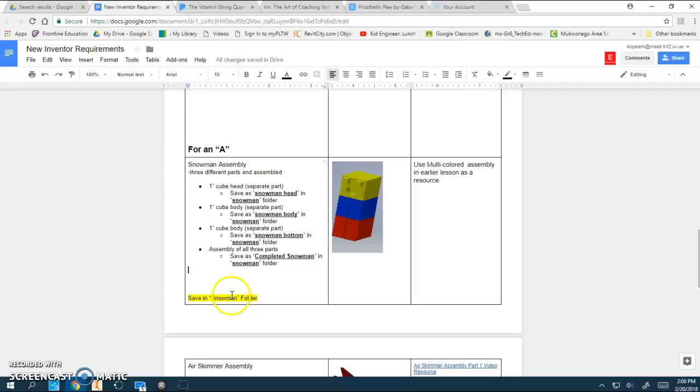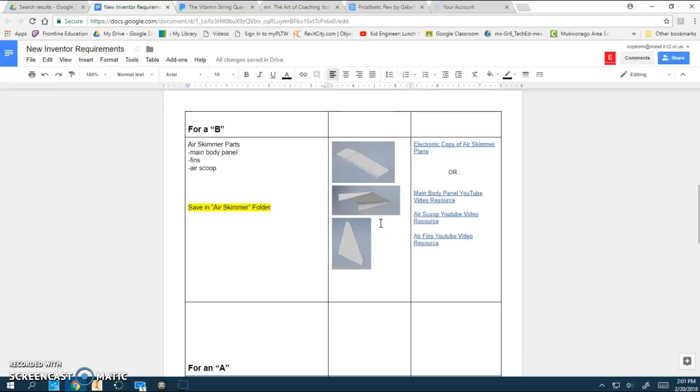Now what we're going to do is take the air skimmer parts that we've created up here on your new Inventor requirements checklist. We're going to take those and form an assembly, putting all of them together just like this.

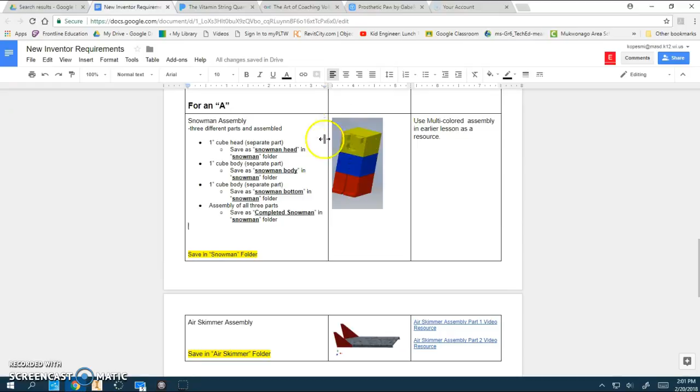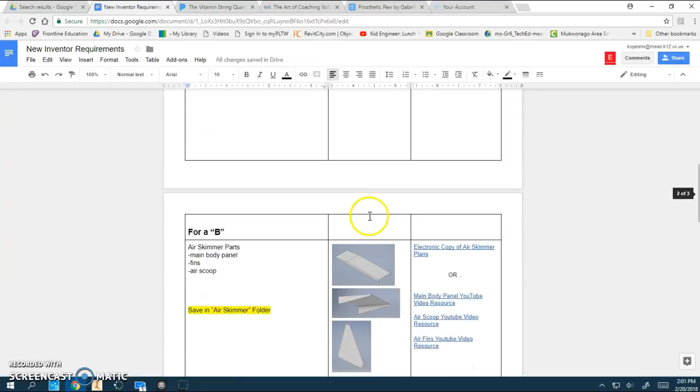We're going to be using the same functions you've learned throughout this class when you put together your snowman, the flushing and mating, and when we started this using the assembly of three multicolored 1-inch cubes, that was the first thing you did. You're doing the exact same thing. There are a couple little tweaks you need to make because it's a more difficult assembly, but for the most part, those are your standard functions that you'll be using.

So you go into Inventor, and if you have this screen, you can just go to Assembly, start a new assembly, or you can go File, New, Assembly, and there you go.

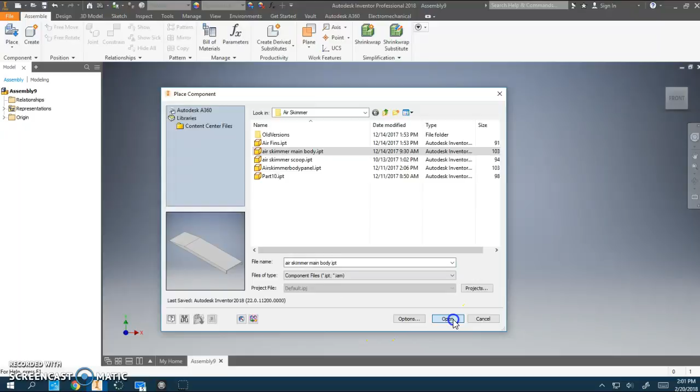Just like before, you're going to place a component, I'm up in the upper left-hand corner here. You want to go into your air skimmer folder that you created earlier in the class, and you want to get the main body panel in there first. Open, and here it is. And you only want one, so you don't want a couple of them, just hit escape.

Now you want to go get the air fins. Now these are the exact same thing, so you can just put one on one side, move it over, put the other on the other side. You don't need to go in and place both separately. You can just, they're the same thing, so they're identical.

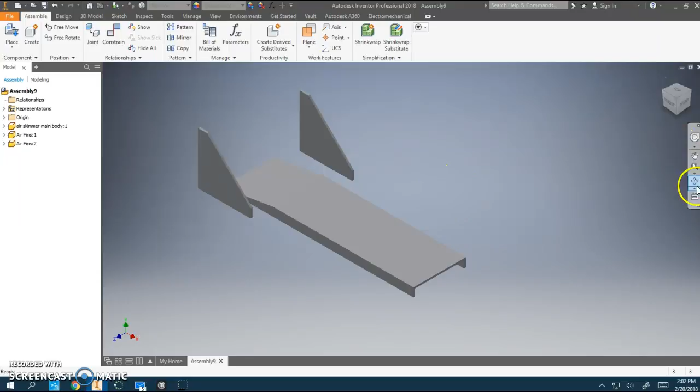So now what I like to do is check to make sure they're lined up in a way where it's going to be easy to work with. So I'm going to move that over like that.

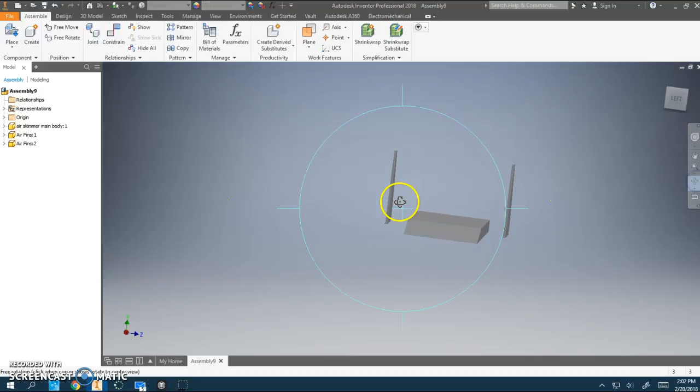And when you are working in Inventor, it is a lot of zooming in, a lot of panning, a lot of rotating. So just get used to that, because this one's tricky, and this is why it's for an A. And if you can't do it, that's okay, but hopefully we'll all get it.

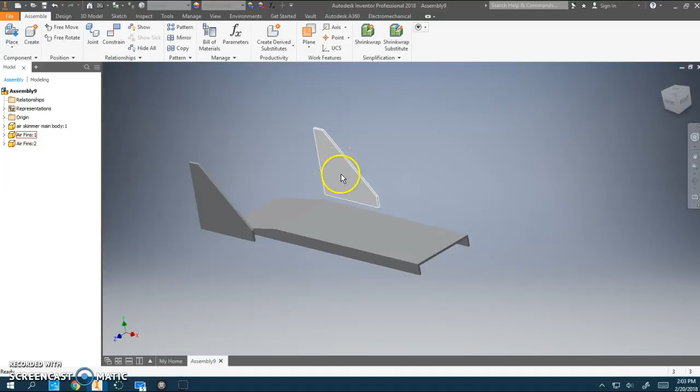So the first thing we want to do is mate this side right here, this face I'm going to call them. These are faces, and the white lines right there are called edges. So we want to mate this side right here with this side over here, right here. Not the edge, but the side.

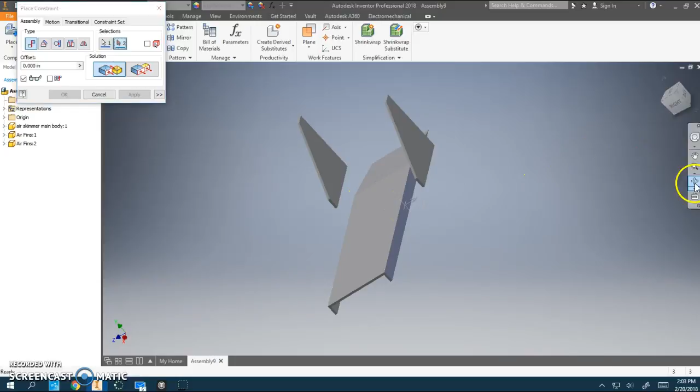So since I'm faced this way, I'm going to go to constrain, that's nothing new to you. And we are going to mate this side by clicking right here. Now, what side do we want to stick that to? What side do we want to glue that to? We're going to rotate it around, and we are going to click on this side.

Now I'm going to apply that. You can tell it didn't go in the right spot. Well, it did do what you told it to do. You told it to stick to the side there, and when I move it, it is stuck to the side. I know that it's moving and you're saying, well, it's not. Remember what I said earlier, it is stuck to that plane. So as I go left and right, it moves with it, but as I go up and down, it's going to stay in that plane.

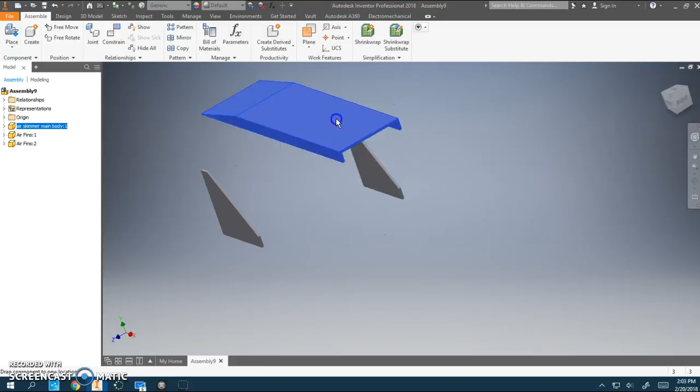So that's the first step. Now the next thing you need to do, it's going to be two flushes. So you're going to click on constrain now, and you're going to go to flush, which is this function.

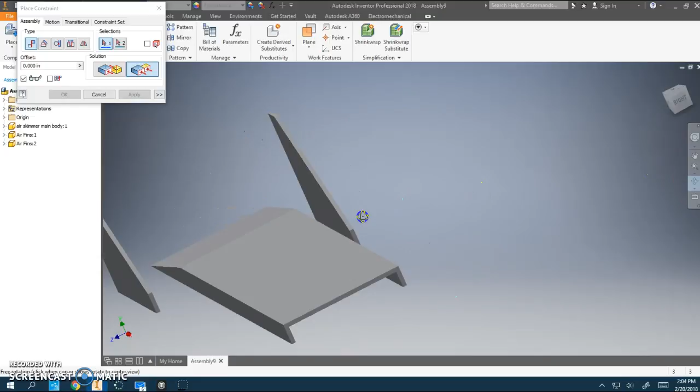This is where it gets a little tricky. You are going to want to zoom in and rotate. You're going to want to do the bottom with the bottom, because as you look at it right now, this bottom is not lined up with the other bottom. I'm going to cancel out here so you can see it, but this bottom is not lined up with the bottom. You want it even.

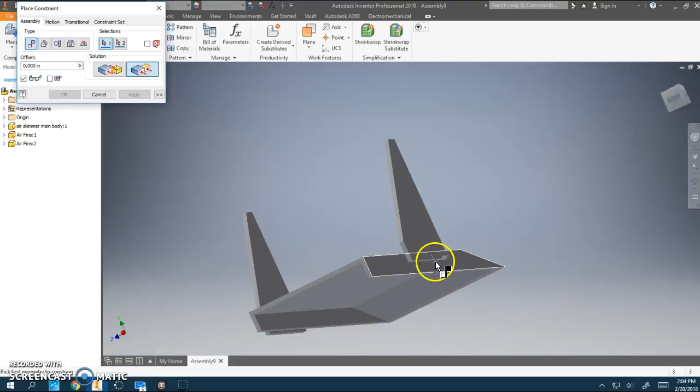So I'm going to go to constrain again, which is up here. Constrain, and I'm going to go to flush, and I'm going to have to rotate this and zoom in so I can do flush here. It's going to be this one right here, and it's going to be that one. You can notice that I'm highlighting the face, not an edge, but a face right there.

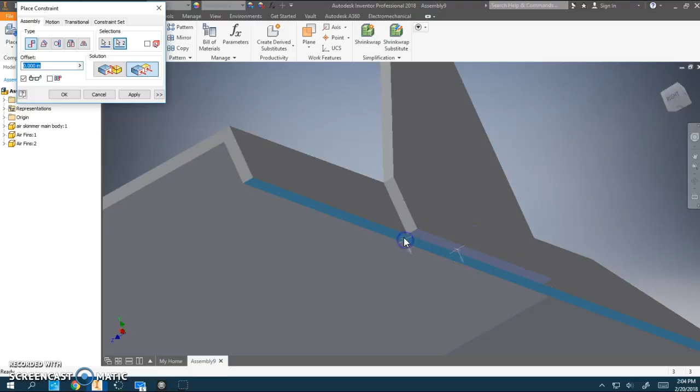And now you could tell that it's even. I'm going to click apply. You can see that that is even on the sides here. So when you look at this, you can see that it's even up here and here. So the only thing that we need to fix now, I'll zoom out here a little bit. You can tell obviously that it's not lined up in the back.

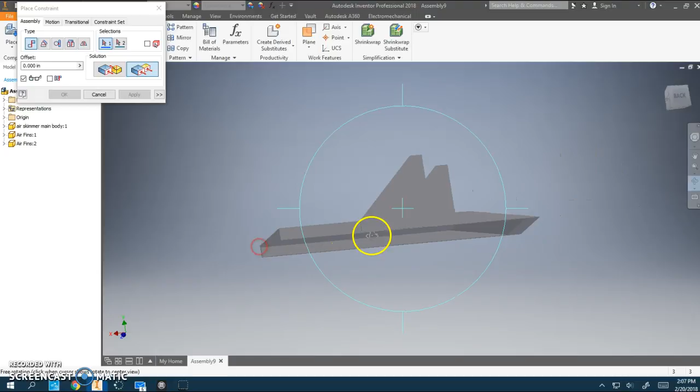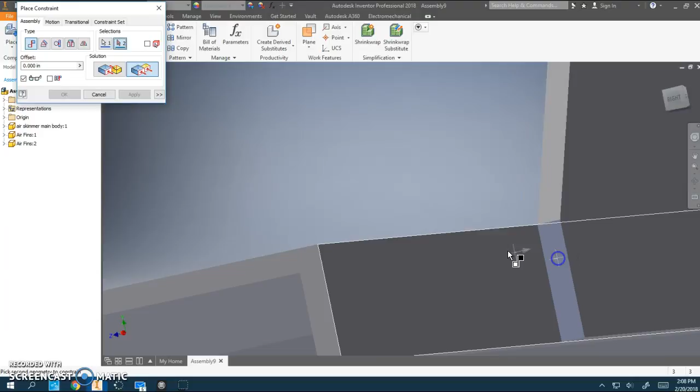Now this is where it's counterintuitive, which means it's not going to make sense, but you'll understand why we're doing it this way in a second. So now you want to do this. We want to flush the front side with the front side. So we're going to go to flush again, and we're going to go to this part right here, this face of the front fin, and this face.

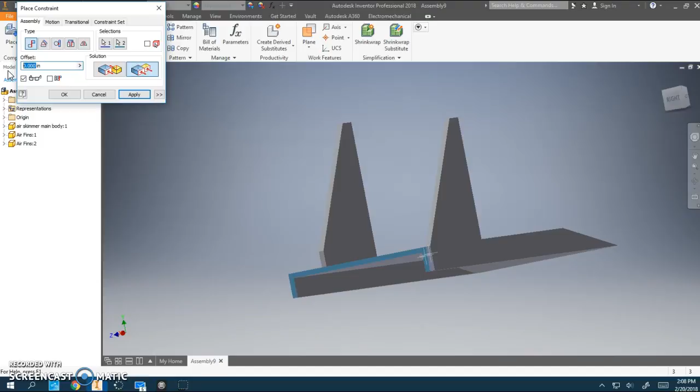What happens is it's going to move it up to the front because we're going to offset it, it's called. Now the thing is, before you hit apply, you need to click on offset, which is right here. Offset means how far away do you want it from that face. So I'm going to click in 8 inches. The reason I'm clicking 8 inches is because if you remember, the whole air skimmer was 11 inches long. And if this air skimmer is 3 inches, that means 11 inches minus 3 is going to be 8 inches. You can see already that it moved it back to the right spot.

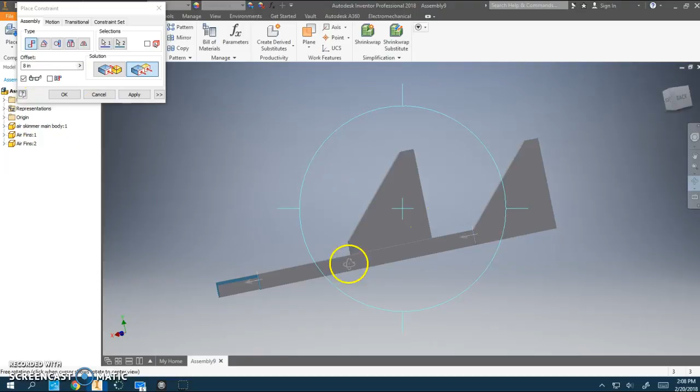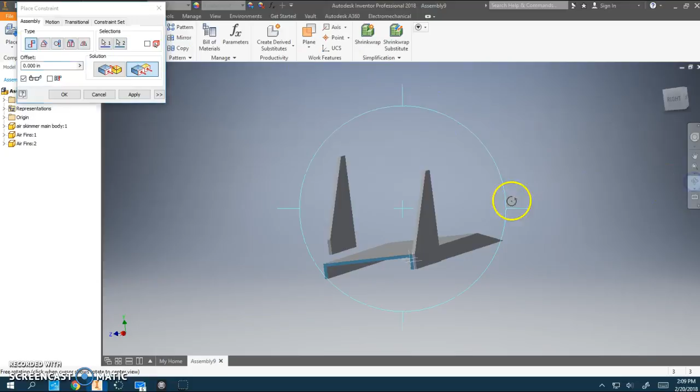So I'm going to do that part one more time so you can see what I'm talking about. Move it over, we're going to do one more constrain. We're going to flush. I can see that it's on there, on the front of that fin and on the front. And then when I click in 8, you will see it slide back to the back of the air skimmer main body panel. So let's type in 8 here.

And you can see it slides it all the way back. That means it's 8 inches from the front, and we did our measurements so we know that's right. You click apply and there you go. That's how you attach the air fins to your skimmer.

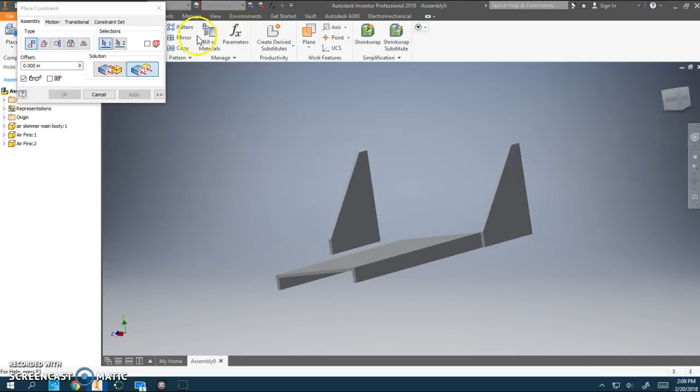Now you have to do the same thing to the other side, but I don't need to go through the whole thing again because I know you should be able to do it.